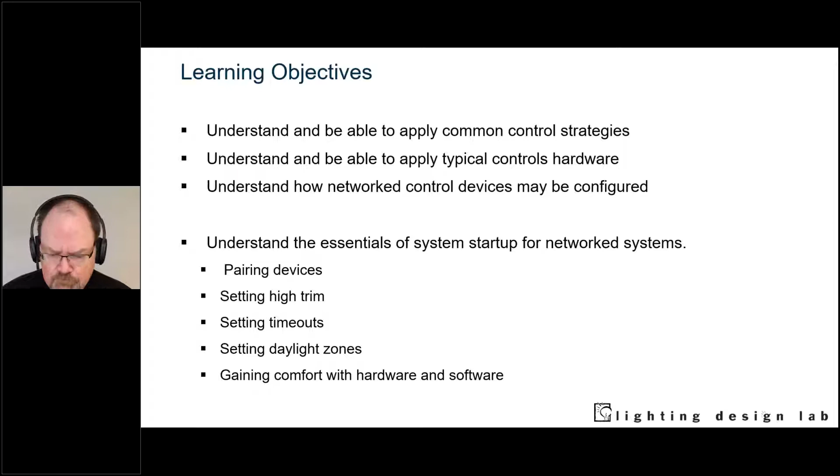So let's start off with the very beginning here. Why do we want to use advanced lighting controls or networked lighting controls? The idea is that we want to take most advantage of our investment in lighting systems, to maximize their benefits to all of us within the built environment.

What are some of the things we might talk about? Well, flexibility, satisfaction, aesthetics, maintenance - we can go through all of these things. But the idea here, from the very beginning, is: if you buy a piano and you don't tune the piano, you don't get the proper benefits of that piano. So let's start from that basis and move on and talk about some of these.

So flexibility. In my world, the most important reason for using advanced lighting controls is flexibility, space flexibility. You want to be able to offer as many different ways to interact with your architectural investment as possible, and make sure that it's going to function the way that you're hoping it will. This is a great example here.

These are 3 different lecture halls at the University of California, Davis. Let me be clear, these photographs were taken several years ago when I was working on a project there called their Smart Lighting Initiative. They may have changed by now, who knows? However, at the time, none of these spaces had significant lighting controls or any dimmability at all.

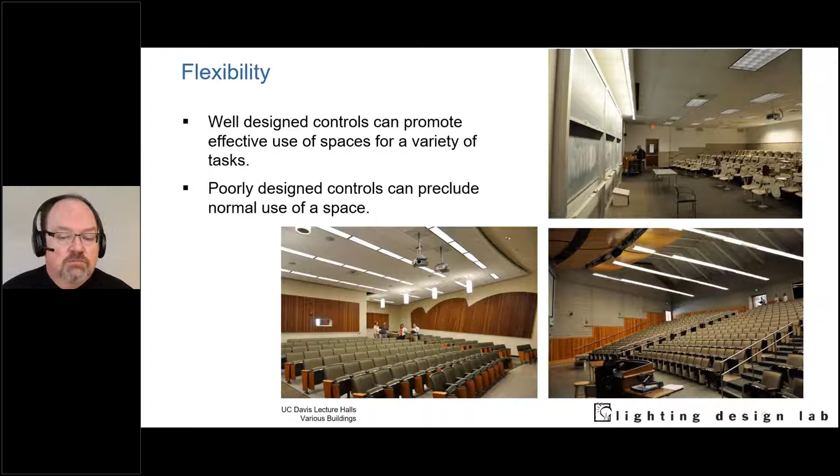All right, so flexibility is one thing. What about productivity? There are a lot of elements of productivity. We've talked about productivity in the lighting industry for many years. Jennifer Veitch, National Research Council of Canada, I believe, worked on a study in the early 2000s having to do with quality of light and productivity. A lot of that same stuff really extends into lighting controls.

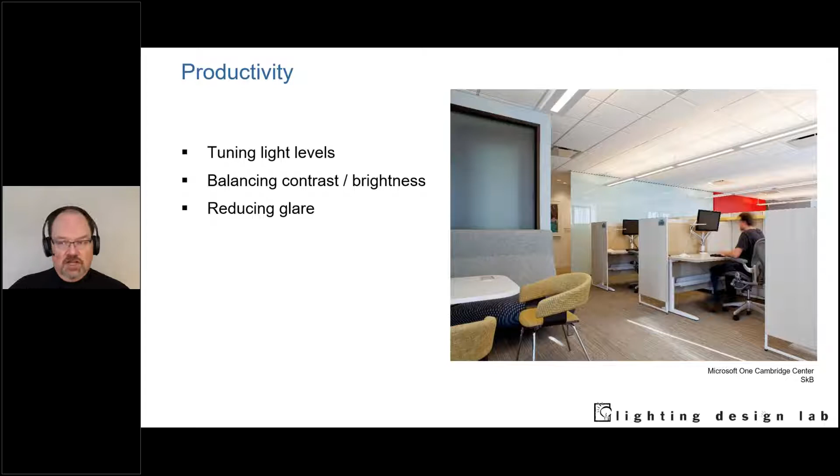We all like to be able to do things like have control, tune our light levels so that we're getting the light we expect - not too much, not too little - balancing contrast and brightness, reducing glare, and actually being able to change our lighting and light levels according to whatever specific tasks are.

That really does lead right into user satisfaction. We all like to have personal control over our environments—the more control we have, the happier we are. Studies have shown that private office users, when given the ability to dim their lights, will dim them down below whatever light level the design team initially suggested. So that gives user satisfaction, and it also gives a certain amount of energy savings. These are good things to be able to do.

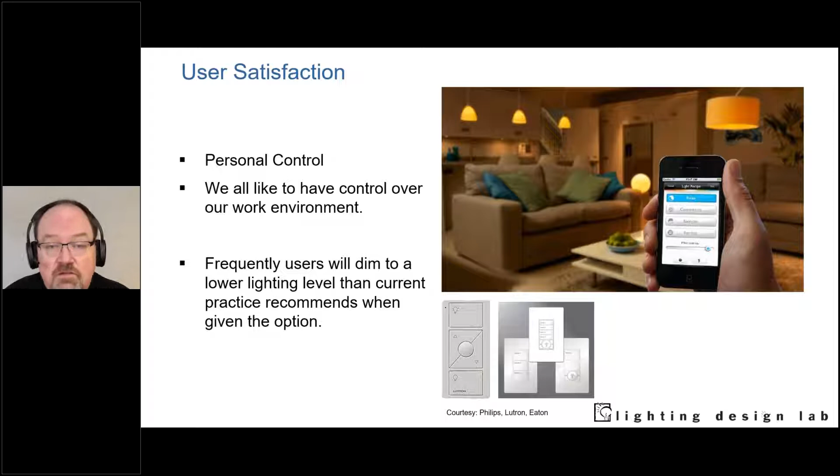Maintenance. Modern light sources are LEDs. What is an LED? It's basically a solid state device, and like all solid state electronic devices, the number one enemy is heat. If we take our LED light source and underdrive it, dim it, that effectively means it's generating less heat, which theoretically means we're going to potentially extend the lamp life.

By using lighting control systems—turning the lights off when we don't need them on, task tuning so the lights are lower in intensity than they otherwise would be—all of these things can lead to significant improvements in lamp life and longevity of the system. Some systems also have a variety of talkback features. They may offer an indication that the junction point of the LED is running too hot, or the driver is running too hot, and there may be some issue there. So that's a potential maintenance issue as well.

Another one we all know about: sustainability programs. The relatively new kid on the block, though it's been around a few years, is the WELL Building Standard. I hope everybody has heard of it—think of WELL building as LEED for people. LEED is predominantly about the physical built environment, the health of the building, the materials of the building. The WELL Building Standard extends that and asks: what about the people that live in that building?

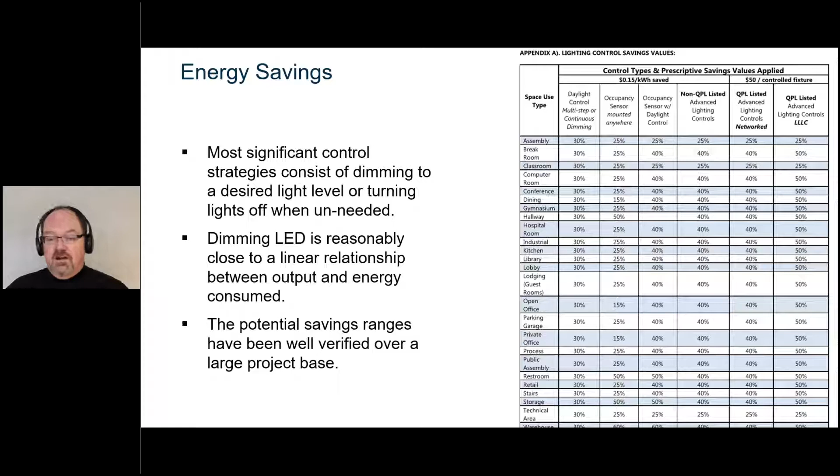Energy codes. We certainly need to pay attention to energy codes. In fact, the Seattle Energy Code has just been updated. We, Lighting Design Lab, just partnered with the Seattle SDCI to put together a series of energy code update webinars. If you are interested in specifically the Seattle Energy Code and changes, go to our Lighting Design Lab webpage and you'll be able to find the recorded webinars that we put together there, some really good information. We'll also talk more about energy codes a little bit later. I think that will be tomorrow.

And of course, there are others, right? This is my list, and the order of the list is specific to me, right? It's what I have found to be useful over the years in order to get owners to install lighting controls, in order to get end users to understand why we're installing lighting controls. And I found it very helpful. Your list may be a little bit different, and that's okay, right? Whatever works for you is what you should really look at.

And I will say that the order of the list might change depending on where we are, right? Here in the Pacific Northwest, we're blessed with some of the lowest electricity costs in the country, right? If I was having this conversation in Hawaii, where electricity rates are multiples of what we pay, the energy savings might jump a little bit higher on the list, right? So you really have to bump those around as necessary to make sense with what you're doing and your specific needs. Okay. So those are some of the reasons that we might want to use advanced lighting controls.

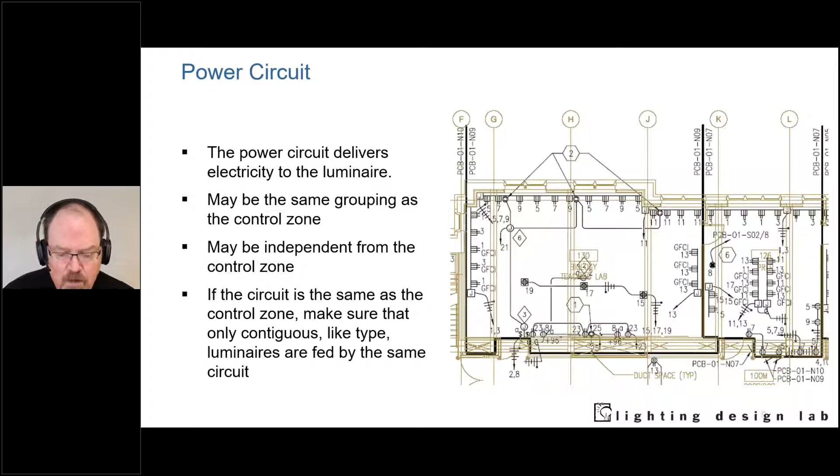A more modern way of thinking about lighting controls, and this really starts to come from theater initially, is the idea of the control zone, or if we're talking about theater, we would call it a channel. The control zone is a logical grouping of light fixtures that are always doing the same thing together, right? So if I have a fixture here and a fixture here, if they always want to dim up and down together, they can be on the same control zone.

If there's ever a time that I want this fixture to do something differently from this fixture, that has to be a different control zone, right? Because physically there's a device telling this to dim, and I can't break them up if they're on the same physical device. So they might be the same grouping as a power circuit, but more likely they're independent from the power circuit. Most of the time, we actually feed a whole bunch of control zone devices from one circuit these days. That simplifies installation. It also simplifies procurement and a variety of different things.

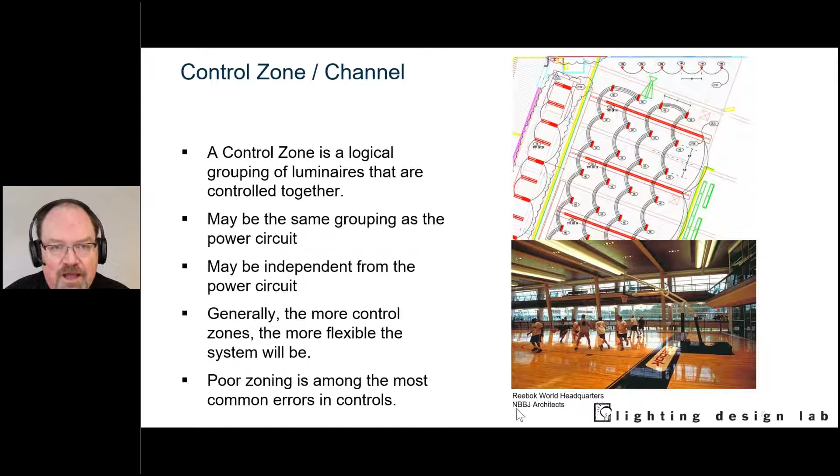And you'll notice that we have, you know, I'm realizing that you're probably not seeing my cursor. So let me get my spotlight. There, you probably should see this now. I hope you see it anyway. Yeah, we can see it. Okay. Sorry, it's been a while since I've done one of these.

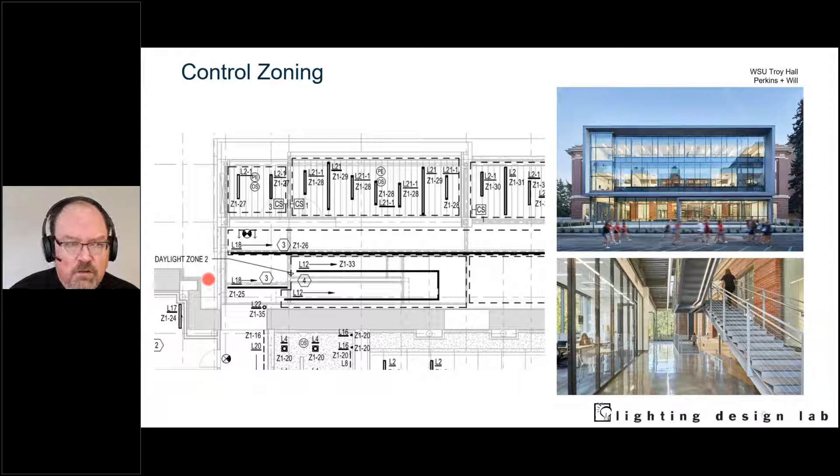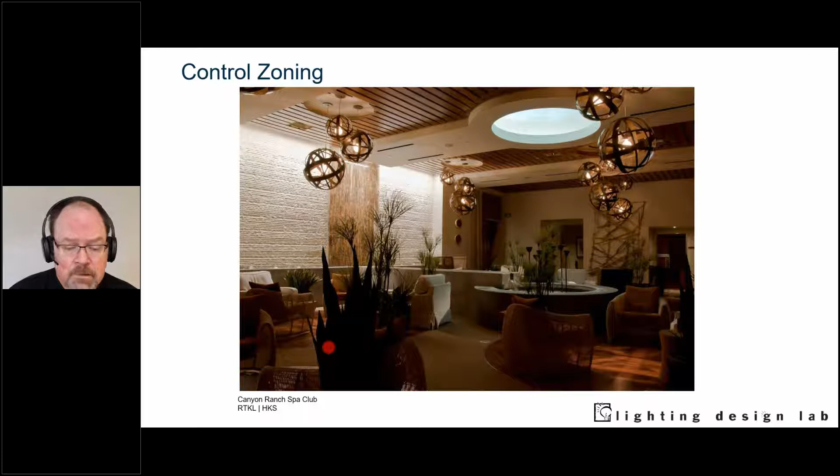So it's repeatable. You really want to be using dimming now. You don't want to be using switching anymore because everything we use is dimmable. And you want to have something that we call a fade rate. So if you have light that changes quickly, it's a problem. It's sort of jarring to you. If you have light that changes slowly over time, say 30 seconds, you don't notice anything's happening.

Now, you may be enjoying, let's say, a happy hour libation with some of your coworkers in the before time when we could do things like that, and hopefully will again in the future. And somebody starts fiddling with the lights, something like this. Something surprising happens. You get jogged out of whatever it is you're talking about: the day, your kids, whatever. So this forces you to look up.

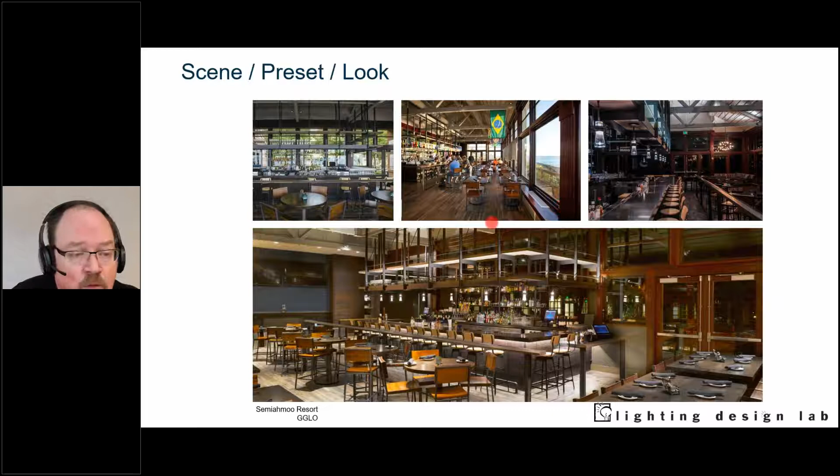Now we are going to have a brief pop quiz. You didn't realize there were going to be pop quizzes, did you? So what are some of the reasons that we might want to use advanced lighting controls? Are they flexibility, user satisfaction, increased productivity, they add complexity to the project, maybe it's energy savings? What do you think? What are some of the reasons that we might want to use these control systems?

All right, give you another couple of seconds here. And let's close and share the results.

So how do we think here? 60% of you think flexibility, 10% user satisfaction, 10% increased productivity, 20% energy savings. The fact is that all but adding complexity are in fact correct, as one might surmise. Which of these becomes paramount really depends on what your project is.

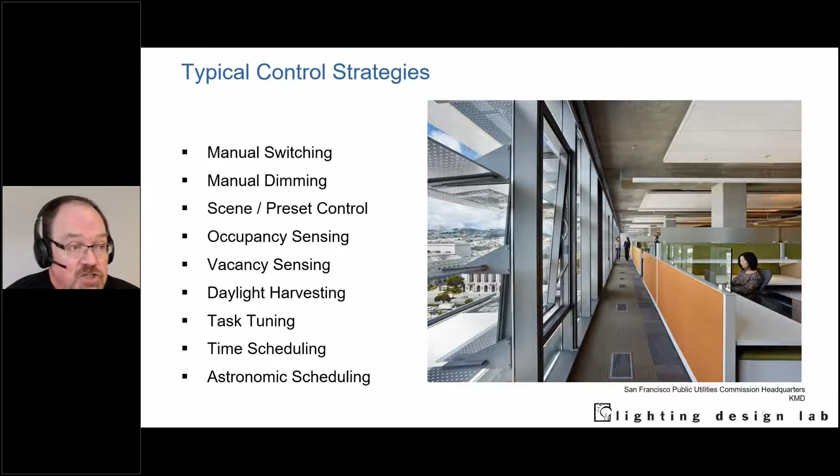The good news is that network lighting controls handle all of these easily, and there is the ability to mix and match and change over time as we need to based on some of the hardware.

Okay, so manual switching - well, we all know about manual switching, right? You press a button or you flip a switch and lights go on, lights go off. That might be power handling with line voltage, it might not be power handling, it might have low voltage relays somewhere, right?

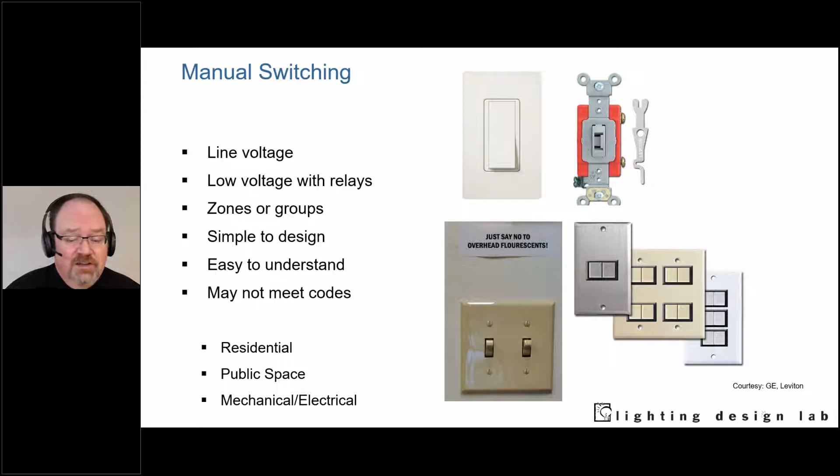The thing is, most of the time, I don't recommend people do manual switching anymore, right? Most of the time, the light sources that we're talking about, they're LEDs, they're inherently dimmable in almost all cases for specified lighting. So really, we should be talking about manual dimming, right?

So manual dimming gives you the ability, whether it's a power handling device with line voltage, or remote control to a dimming cabinet, or sending a signal to a dimming driver - we'll talk about that a little bit later - the idea is that instead of just being able to turn lights on and off, you want to be able to have some ability to modulate the amount of light that you have in the space.

This really does come back to that notion of user satisfaction. It also comes back to flexibility, right?

Now we also can talk about scene or preset control, right? And this gives you the ability to have a device - in this particular case we're looking at one of the Lutron GRAFIK Eyes or a Pharos system or similar - and it's the ability to have a variety of different control zones that you can program, and then you can call them back either from the main unit or from some kind of remote unit, right? So it's repeatable, it's great and all that stuff.

Now, it used to be that there was this continuum, right? You had to choose - you had either switching, or you had manual dimming, or you had some kind of scene preset. And if you're going to do the scene preset, you had to commit to this $1,500, $2,000 in-wall unit to be able to do that.

When we talk about network lighting controls, normally speaking we're talking about a series of parts and pieces that all talk to each other, controlled today with some kind of programming, most commonly put together with an app from your smartphone or sometimes your computer. But it really means you can do all of these three elements with a relatively small kit of parts.

Let's start again. Before I start the actual video, let me give you a quick synopsis. This is a lighting control board, one of the ones I designed and built for this class, that is intentionally made to look an awful lot like building wiring.

Essentially, we've got a bunch of light fixtures. Think of each one as its individual control zone. A control zone could be one light fixture, or it could be a number of light fixtures. We've got through wiring coming from, let's say, this cord over here coming from our load center, from our circuit breaker panel, and it comes into each box, and each box is daisy chained. So we have through wire from box to box to box to box to box, and then we go out from the box to the individual light fixture.

So this is really what you would find in a building, except writ small. The biggest difference here is that this little bit of conduit is 2 inches instead of 10 feet.

Piggybacked onto this, we have what we call load controllers. These are specific load control devices. They accept a signal from a lighting control system, and they are essentially saying turn on, turn off. They have a relay within them, and then they're sending a 0 to 10 volt signal, dim up, dim down, according to whatever the control system is saying.

Now, this is one manufacturer's control system. There are 8 or 9 that we use in these classes when we do the hands-on components that can all do the same thing, and they can all do it well.

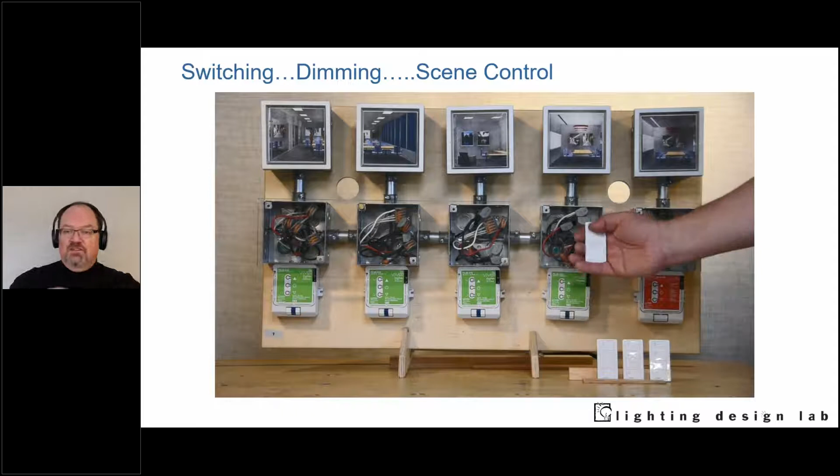So let's see what this maybe means a little bit here. I've got a 2-button switch, so I am turning lights on and I'm turning lights off. So if I want to, I can do manual control, manual switching, up, down, just on, off.

I can also, with the same system, with a very similar kind of wireless device, do raise and lower of a single zone. I'm turning it on, I'm turning it off, I'm dimming it up, I'm dimming it down, turning it off.

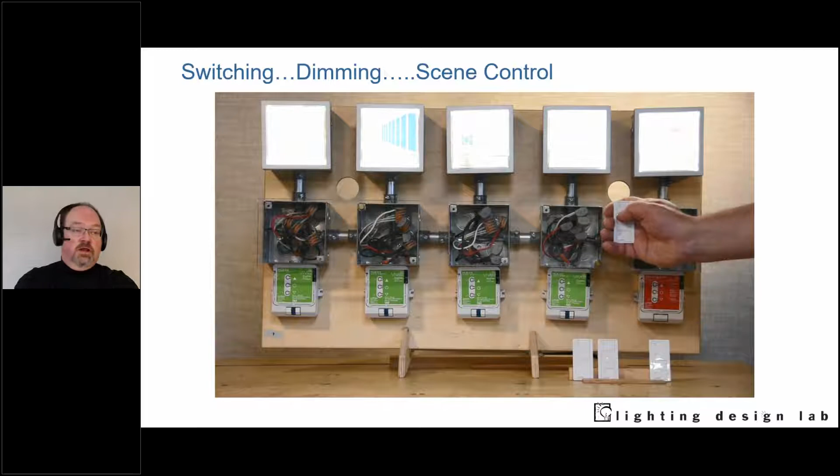Then, from the same basic kind of device, I can turn on a whole scene. I can turn on a whole bunch of fixtures, and I can raise and lower the whole group if I want to. I can predetermine which of these want to be associated or paired with each individual device, or I can set up complete scene control.

So this is a 4-scene device. There's scene 1, there's scene 2, there's scene 3. So instead of having to go and purchase a $1,300 or $1,400 or $1,500 scene programming unit, now scene control, switching, or dimming, it really is all about programming. You're going to have the initial devices anyway, so it's really all about choosing how you want to use them.

Do you want individual switching? Do you want individual dimming? And most of the time, this is available wireless. You can do it wired as well, but it is what it is. All right, so I hope that makes some sense.

Let's skip that. All right, so that's a little bit about the switching, dimming, some of the capabilities you can get to. Let's talk a little bit about some of the other strategies. There, of course, is occupancy sensing. We're all familiar with this: you walk into a space, the lights turn on, a certain period of time later, the lights turn off.

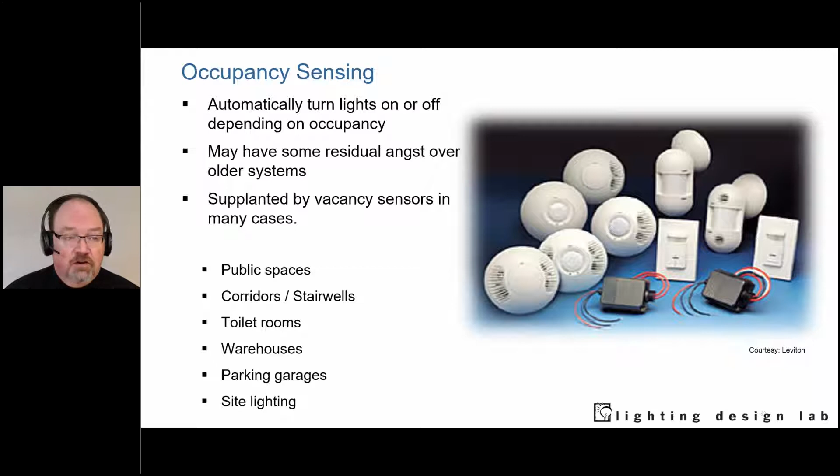This is separated from vacancy sensing. Vacancy sensing requires a positive push on a button in order to have the lights turn on, otherwise the lights won't do anything. So it's the difference between manual on and automatic on, which is between them. Now there are arguments, particularly with respect to usefulness and energy savings for both.

But the reality is, if you're going to use a sensor, use a sensor. In all but one instance that I'm aware of, the actual physical sensors are the same, and the difference between occupancy and vacancy sensing is entirely programming. We'll talk later about some programming tricks for occupancy and vacancy sensing to make them work really well, but that'll be in the programming segment.

One thing to think about with occupancy and vacancy sensors is that most of them, at least for modern systems, certainly all the wireless systems, are passive infrared. So what does that mean? It means that a passive infrared sensor is essentially looking for a heat signature across a number of segmented fields and movement across those segmented fields.

So what does that mean in practice? Well, if the sensor can't see you, then it's not going to understand that you're there. Or said differently, if you can't see the sensor, the sensor can't see you, so you're going to have false triggers off. In fact, a friend of mine in Idaho just moved to a new office last week, and she said the lighting was great and all, but the occupancy sensor keeps timing out on her because it's not seeing her.

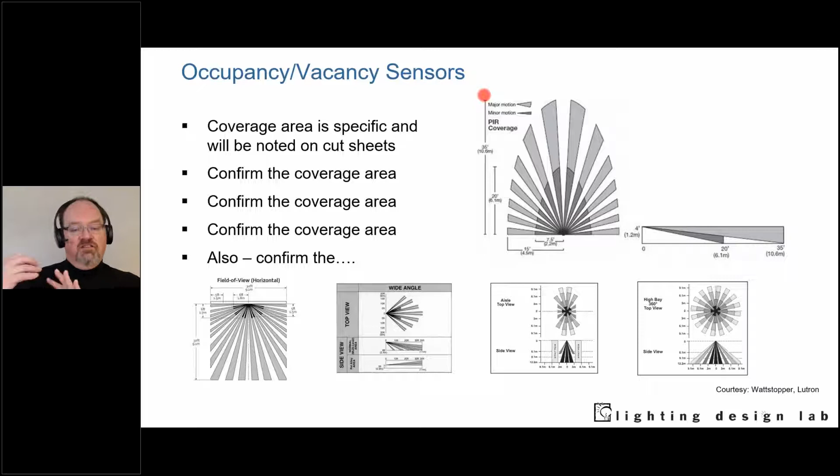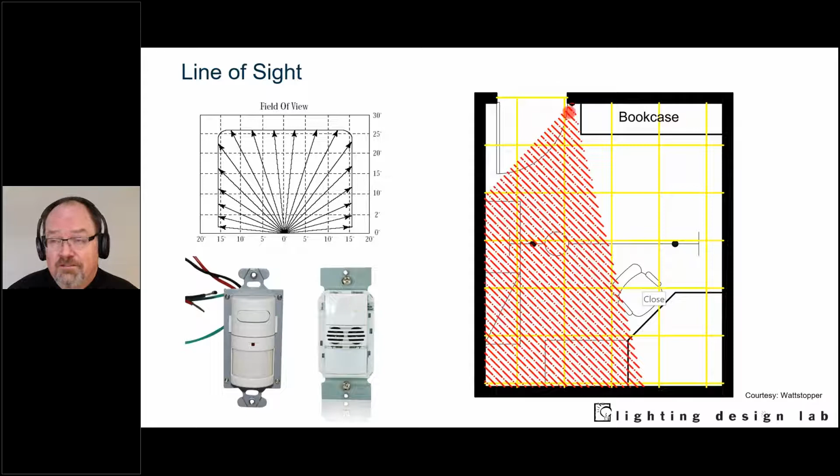So as we talked about, if you put sensors in the wall, this is a very popular way to put in occupancy sensors, because if you've already got a switch leg going down the wall, you just have to replace the toggle switch. So it's great for retrofits. But the problem is that it frequently has difficulty seeing people. If you're going to run into that, go ahead and put in one of these ultrasonics rather than a passive infrared. I normally prefer passive infrared for some reasons, but if you're going to have a situation like this, go ahead and use the ultrasonic.

Even better, go ahead and put them up on the wall high, like in a classroom, so that you can see a higher percentage of the room. Or even better, my favorite choice, put your sensors up on the ceiling. When you put things in the ceiling, they can see basically the entire space - that's important.

I will say that it took me a while to really warm to the idea of battery-operated sensors, but I showed you that San Francisco Public Utilities Headquarters project. That was completed in 2012. That was the very first project that I ever designed that had nothing but battery-operated sensors. And actually, it worked out so well that that's pretty much all I use anymore is battery-operated, right?

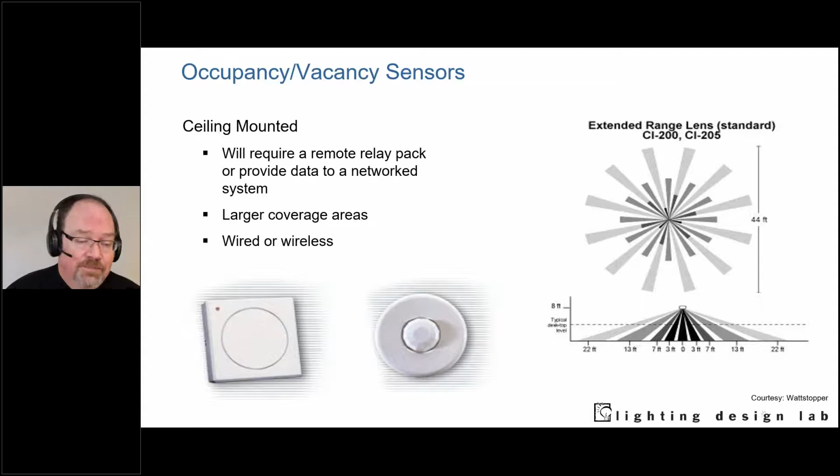The amount of pipe and wire that you save is huge. Also, the ability to quickly and easily shift things around if necessary. You know, the sensor is 2 feet too far that way to pick everybody up. Great, move it, not a problem. Or add another one. These things are not expensive. Stick another one up into the ceiling, pair it. It takes 5 minutes to program it to the system. That's why I kind of like these sensors. All right, so that's occupancy and vacancy sensors.

What about daylight harvesting? So we have this idea, right? We have abundant daylight in the space. We want to be able to dim the lights, dim, dim, dim, never switch anymore. Dim the lights according to the amount of light that's available.

If we had more time, I would tell you a great story, maybe later, maybe tomorrow I'll tell you the story about the Unum Corporation up in Maine.

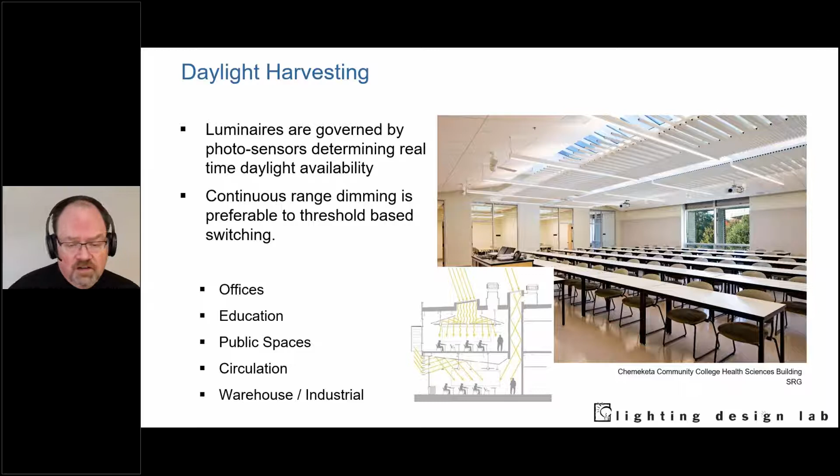So daylight harvesting, we're using a photocell. There are a few things to think about with respect to this, right? So you can have what we call open loop sensor systems, which basically means that the sensor is looking towards the sky, towards a window, through a skylight. Essentially, think of this as a broad brush, right? It's not as fine-tunable as the closed loop, but it's very easy to commission, right? It's always kind of looking outside. It's sort of the big ship of daylight controls. It kind of slowly makes some changes.

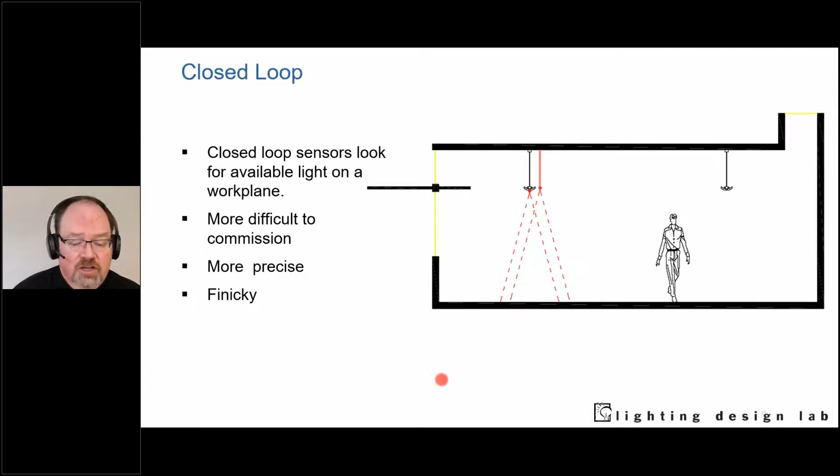Okay. So next one is task tuning or high-end trim, right? So that's the idea that as lighting designers, we've all been taught to overlight spaces for a variety of different reasons. The number one reason is so that we can compensate for what we call lumen depreciation, right? So that over time, all light sources degrade. They'll put out less light as they age. There are other, we call them light loss factors, right? Dirt depreciation and some others.

There's also, frankly, let's just say most designers will add in a little bit of fudge factor because there may be last minute changes to architecture, right? So if I really design a close system and I'm assuming that I'm going to have a 90% reflective ceiling tile because that's what the construction documents show, but then later on the site, I find that they've value engineered that to a 70% reflective ceiling tile. Is that going to have an impact on the lighting?

Yes, indeed. What if they've gone from a floor that's like this, that's relatively reflective, to a dark carpet? Well, that's going to have an impact. What if they've gone from a white wall to a dark blue wall because that's the corporate color? Well, that's going to have a big effect, right?

So typically a lighting system new out of the box is somewhere between 20 and 30% higher light level than it actually needs. Task tuning or high-end trim basically means you go ahead and from day one dial it back so that you dim the lighting system down to the target light level that you were aiming at anyway, and that can save as much as 20 to 30% of the energy right off the bat. Over time, you're probably going to want to come back in 3 years, 4 years down the road, bump it up a little bit, but over that whole time, you've been saving a ton of energy.

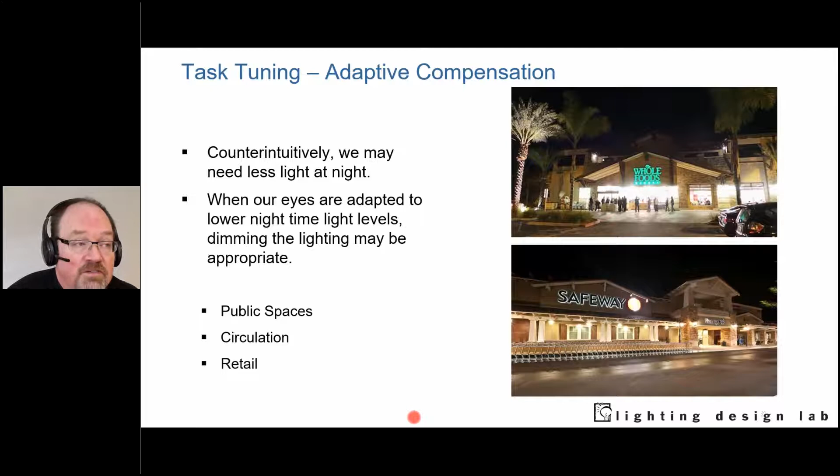The Safeway manager that I was working with, I think he was actually the Safeway CEO, was in for the meeting. Wasn't really thrilled when I told him that I referred to this idea of the Safeway squint. There was a Safeway up on Broadway in Capitol Hill where if you walked in, it was so overlighted at night that it actually hurt you for the first 5 seconds as you walked into the space. That was all wasted energy, right? The only usefulness for it there was to hurt my eyes, right? So this is one sort of key area that you can use adaptive compensation.

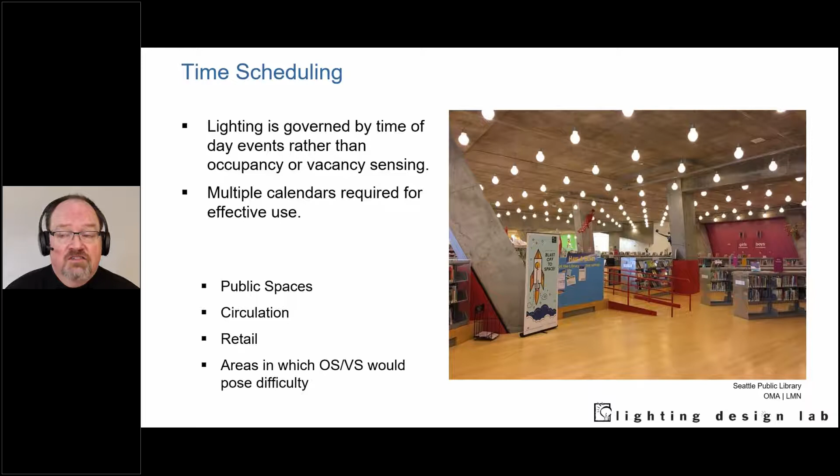Time scheduling, we all know about time scheduling, right? We have the ability to turn lights on, turn lights off according to some schedule. I will tell you that this is much less common now in buildings than it used to be because more and more areas require occupancy or vacancy sensing. So unless you're going to use time scheduling in conjunction with occupancy and vacancy sensors, and we'll talk about that in programming, you really tend to see most things being governed by sensors, except maybe large areas or lobbies, places like that.

Special case, astronomic time scheduling. So astronomic scheduling basically means you take the longitude and latitude of your space. For Seattle, that's 47.6 degrees north by 122.3 degrees west. And the system will calculate every single day sunrise and sunset.

Why does that matter? Well, if you've got exterior lighting, facade lighting, whatever it happens to be, if you want to have all of the lights come on or all of the lights go off according to the availability of daylight, this is a great way to do exterior lighting so that you don't get into that whole issue of having a multiplicity of photosensors. You might have a bunch of pedestrian poles, each one that has its own photosensor. And then for the space of about 45 minutes every night, they'll come on at different times, and it looks really, really lovely. This is a much easier way to do it.

Coincidentally, this used to be really, really exotic. You used to have separate devices that would actually do all the calculations for you. Now, every single lighting control system I'm aware of does this just automatically because it's a trivial calculation. Right?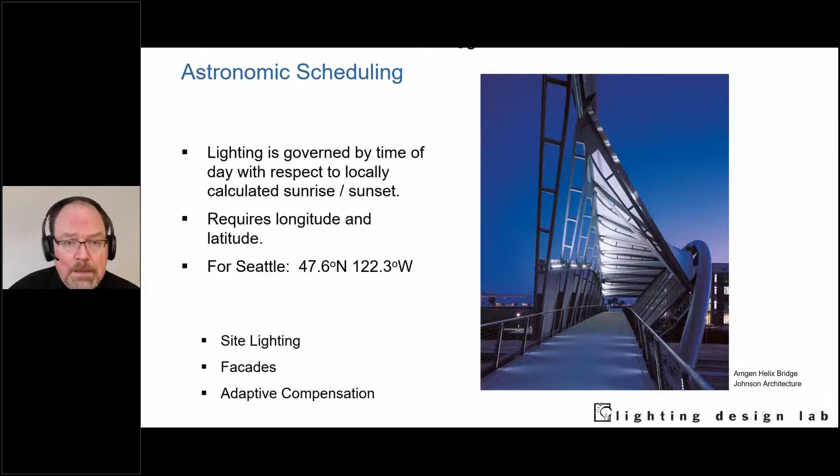Okay. Load shed. A load shed or demand response. This is another control strategy. This kind of came into its own during the Enron days, particularly the California brownouts. Although I suspect, given the recent events in Texas, this is probably going to become really sort of interestingly thought of again. But it's also being considered in a lot of different locations, including here in the Pacific Northwest. Not as much for grid stresses. It was really initially put together for grid stresses during the California brownouts from Enron.

But if we go ahead and make use of information from our electric utilities that are telling us about power fluctuations based on the wholesale market, and when those fluctuations are occurring, maybe the energy from 6 o'clock to 8 o'clock at night is the most expensive, right? So then the utility can send a big user a request to cut their load. If we've got a large area lighting control system, we can go ahead and reduce our energy use by a certain percentage, still allow us to use our space while providing 20, 30, 40, whatever it is percent diminution to the electric utility, right?

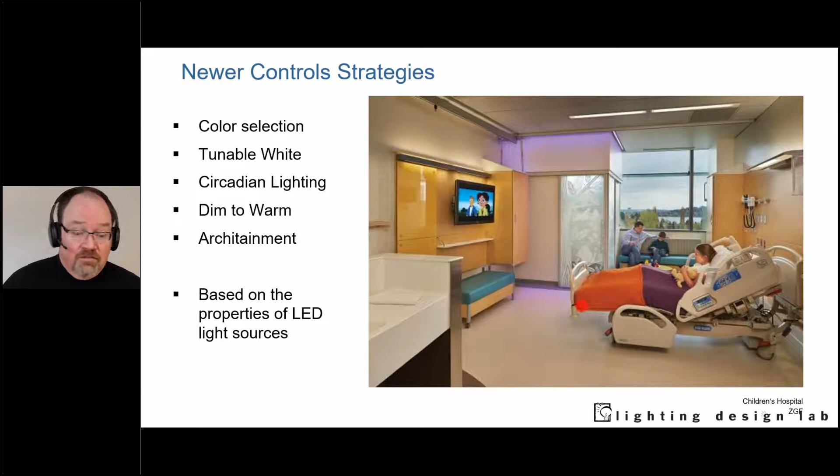This is a good thing to be able to allow them to do. So what are some of these strategies? Well, color selection, right? We just saw one. But the idea is that we have multiple LED chips with different colors that we can mix and match for different purposes.

This is one of the cubes over at Microsoft, over at Building 17. This is an internally illuminated, it's essentially a glorified staircase, right? The idea is that it encourages people to do active vertical circulation rather than going to the elevator core. It's pretty cool. But we can essentially turn these cubes into whatever color that we want with this internally illuminated LED system with Barrisol screen.

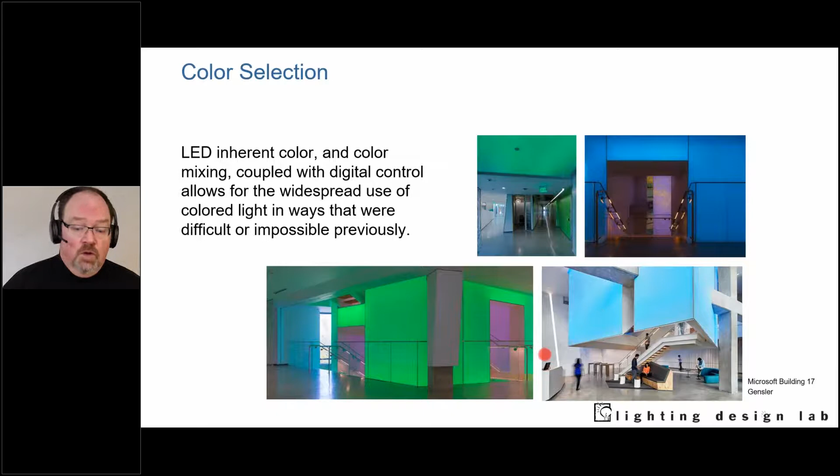If we talk about predominantly white light, we have two real things that we can talk about, right? One is tunable white warm dim, which essentially means that you have a couple of different chips on board in your light source, so that you have a warm chip and a cool chip. And as you reduce the power to the light source, typically from a phase cut dimmer, it dims towards the warm, just like an incandescent would, right?

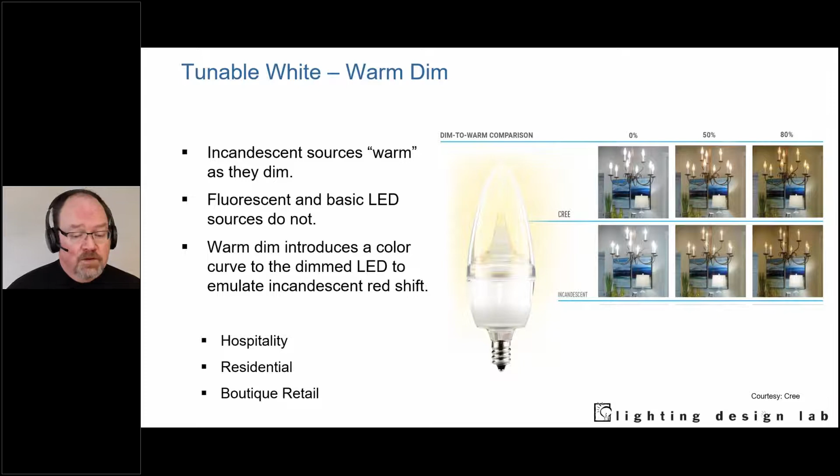If you take an incandescent lamp, you have it at full output, it's one color, 3000 Kelvin, 2700 Kelvin, whatever. As you dim it, the filament cools, it shifts to the red, and it gets warmer. It gives us that really nice warm glow that we really like for residential and hospitality. Well, LED sources naturally don't do that unless you have them set up this way, right? But warm dim is one opportunity for that.

The other is tunable white, which operates essentially the same kind of way, right? You've got a warm and a cool board or cool chip, and you might have some intermediates in the middle there as well. But the idea is that you have the ability to essentially mix and match to get to a variety of different color temperatures or spectral characteristics along what we call the black body curve.

If any of this is unclear to anybody, please go ahead and go back to the Lighting Design Lab education page and look into the light and human perception class. A big discussion of all of this is to be found there, and you can sort of bring yourself up to speed on it. But the idea is that we would use these things to affect mood, affect our endocrine systems for our circadian systems and so forth, or sometimes just for aesthetic reasons, right?

And we see these in offices, right, where we can go ahead and pick and choose what color of light we want, right? Do we want it warmer? Do we want it cooler? To a certain extent, that is a personal choice, but to a certain extent, it also has some impact on our endocrine system based on the spectral power distribution inherent in the light source, right?

And if you go ahead and make use of a lighting control system, you can potentially engage in some behavior modifications. This is something that's really, really of interest in schools these days, right? Or you can go ahead and add a time clock, essentially, and you can wind up having specific effects on, like I say, your endocrine system, your sleep-wake, serotonin, melatonin cycle.

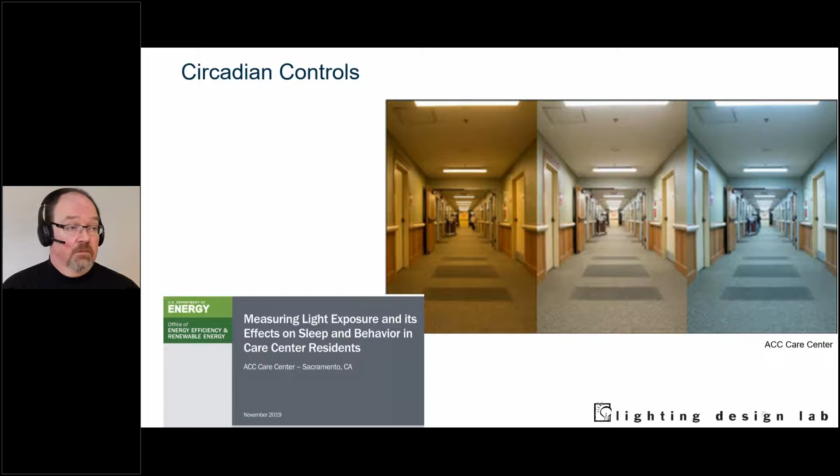So important stuff. Okay. And of course, there's architainment, right? We'll talk about that. But these control systems allow you to do all kinds of cool, groovy things. All right, so let's switch gears just a little bit again about some of these things. So we've talked about some of the strategies, some of the rationales, the basics.

Let's talk a little bit about hardware, right? When we're talking about lighting controls hardware, very frequently, if I ask the question of you folks, how many people have heard complaints about lighting control systems? Everybody's hands would go up, right? How many people have heard complaints about occupancy sensors not working? Everybody's hands would go up.

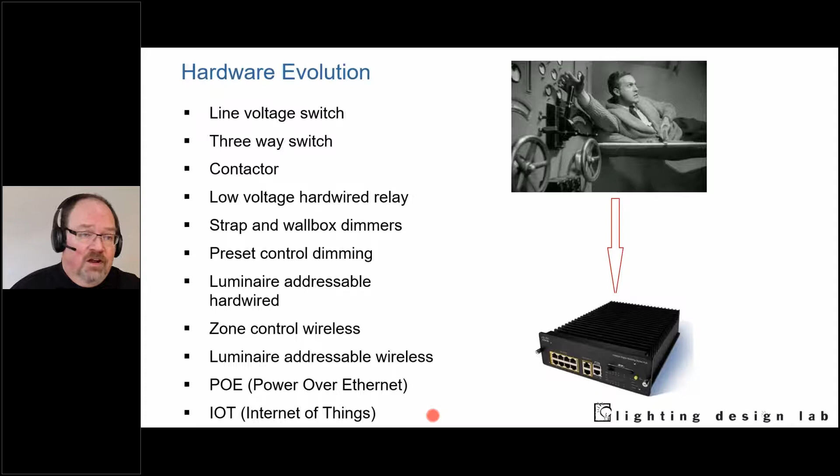I would submit to you that a big part of this has to do with the evolution of the hardware, right? We started out with this mad scientist with his knife switch there, right? And we've gone through switches and contactors and dimming systems and zone systems and PoE, power over Ethernet. And now we're up to the Internet of Things, right? But ultimately, what we've got here is the evolution from analog to digital. And we've seen this in every single device that we have, right?

15, 20 years ago, I had a Crackberry, right? And I was one of those people who you'd get off the plane and I'd be thumbing my way through my email, right? That was not a great device. It was a great device for the time, but it paled in comparison to the devices that we have today. A little bit before that, I was lucky if I had a cell phone that sounded like I wasn't in a fishbowl, right? So all of our devices, whether they're lighting controls, building controls, toasters, whatever it happens to be, the hardware is tremendously better than it's ever been.

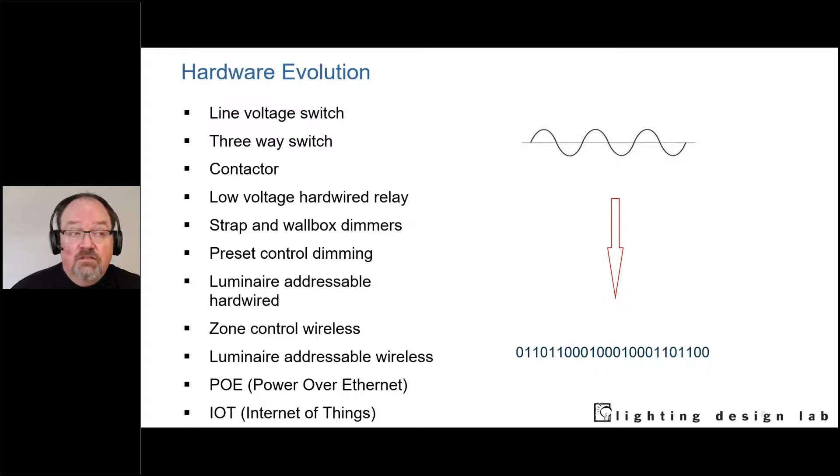So I would submit to you today that in almost all instances, if you have an example of an occupancy sensor or similar that's not functioning properly, it's probably bad design. It's probably because there's some problem with the way it's been set up or the way it's been installed or where it happens to be. It's probably not the device itself. So take that as written.

All right, this is another good time for another pop quiz. What are some of the key strategies, key control strategies that we might employ? Might be daylight harvesting, vacancy sensing, time clocks, task tuning, turning down thermostat. What do we think? What are some of the key strategies we might employ? All right, most of you have voted. Let's kill this and share.

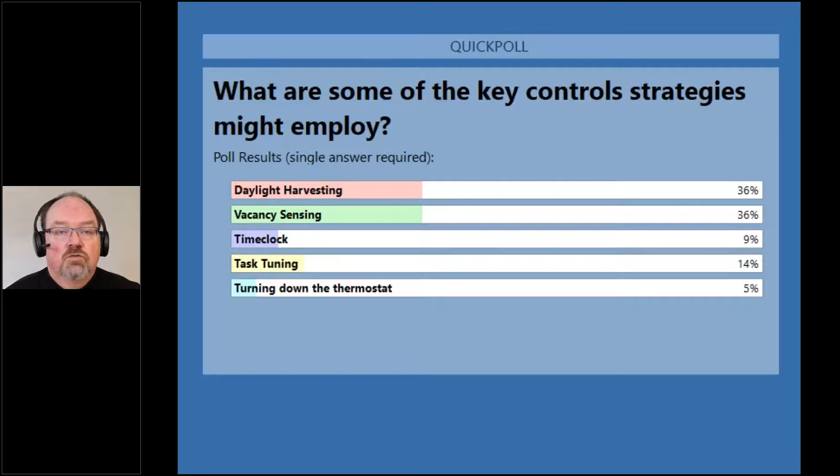So let's spend a few moments talking about dimming. I've mentioned that basically all light sources we're using today are inherently dimmable. LED light sources paired with dimming drivers means basically all commercially available lighting is dimmable one way or another.

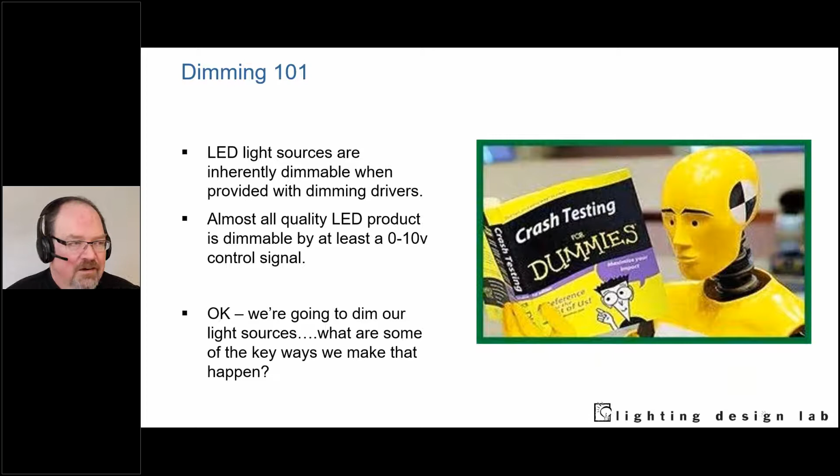Well, how did that start? If we went back into the old days, we'd find it in theater, because basically everything to do with lighting controls started in theater one way or another.

The original dimmers were essentially big tubs of salt water, with a cathode plate at the bottom and one at the top, each with wires going to them. If I wanted the lights brighter, I'd have a stagehand, hopefully with very good life insurance, plunge the plates closer together in this saltwater bath. The closer they got, the more current would flow and the brighter the lights would go. This was a very analog way to think about it. Pull them further apart, there's less current flow, and the lights get dimmer.

Very simple. Fast forward past half a dozen other technology improvements, and we came to the 1950s. A fellow named Joel Spira in New York came up with the idea of using semiconductors for dimming in one's house. The very first triac-controlled, or semiconductor-controlled, wall box dimmer was from 1959, from a small company called Lutron. This is a picture of it.

The idea is that you have devices that switch power on and off a certain number of times per second. When they turn the power on and off, and how many times they do it, determines how much energy is going to go, in this case, to a filament. That filament will then glow either brighter or less bright.

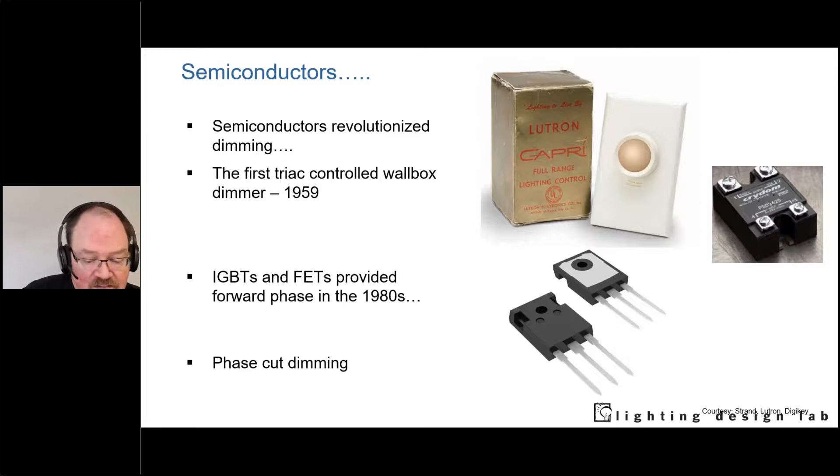So how does this work? In triacs, or silicon controlled rectifiers, we call it forward phase cut. Basically, the power is off, off, off. This is a sine wave — electricity can be represented as a sine wave, forward, backward, forward, backward, electrons moving.

They would do this 120 times a second, because that's how our power is delivered, with a 60 hertz or 60 cycle current — 60 times forward, 60 times back. Each one of these happens 60 times a second, but each half wave happens 120 times a second. So you're turning the power on and off 120 times a second. I hope that makes sense to everybody.

Now, what happens when you turn an electric circuit on is something called inrush. So instead of a pretty little sine wave, it would actually overshoot and then come back, overshoot, and then come back. That led to things like that nice 60 cycle phase hum we'd hear from filaments, because what they're doing is actually oscillating — it's forcing them to oscillate.

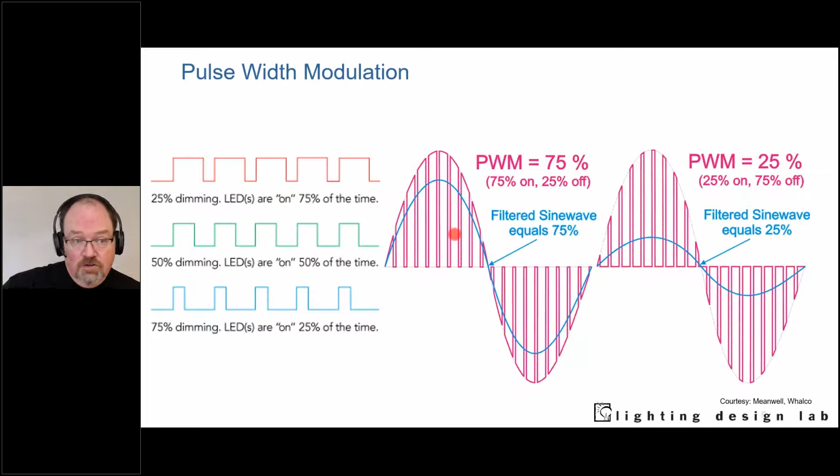Let me show you a quick demonstration here.

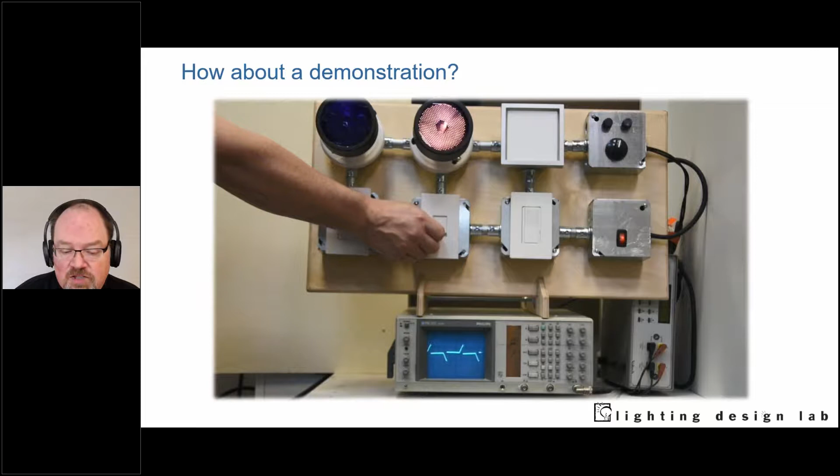This is the reverse phase, which is sliding on - soft start. You'll see that starts to establish the sine wave there. And the last one we have is actually pulse width modulation, so you'll see that it appears to adjust the amplitude of the sine wave because it's cutting it so quickly.

Most of the time when we're talking about screw-based LED light sources, they're phase cut modulation, either reverse or forward phase. When we're talking about native LED light fixtures, they're usually, not always, pulse width modulation, because the dimming is actually occurring in the driver itself.

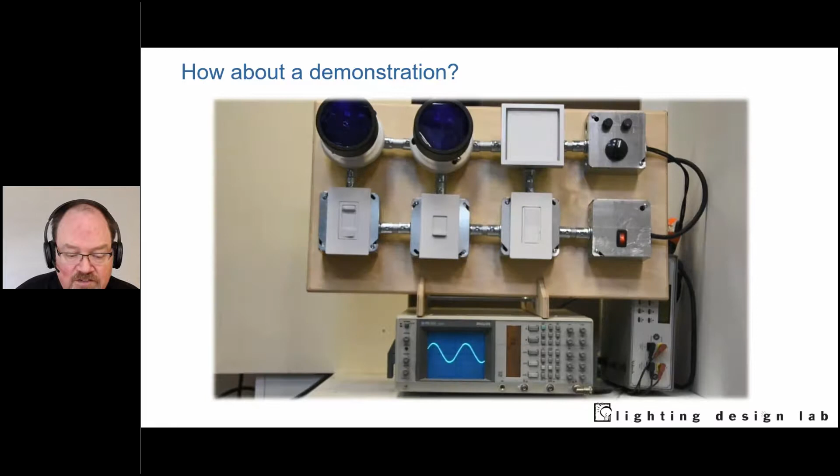So how does that work? Let's jump past this. A quick history of light sources - this is going to be very quick before we dive into that whole bit. If we were talking about this class just a few years ago, we'd spend a lot of time talking about all these different light sources. But the reality is, they're all legacy light sources at this point, so we're not going to spend time today doing that.

If you're interested, we can talk later offline about some of these other light sources, whether they're dimmable or not, how they dim, and so on. But the fact is, realistically, we're talking about LEDs. We've talked about this a little bit - solid state light sources, flexible, long life, all these things. None of this should be news to anybody.

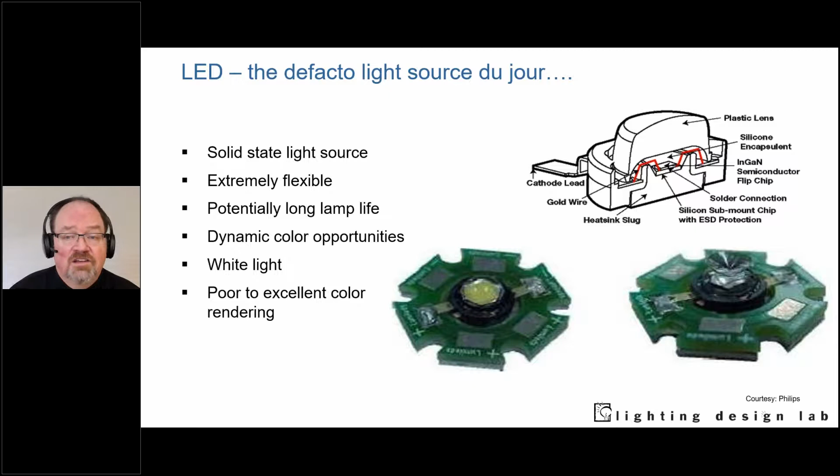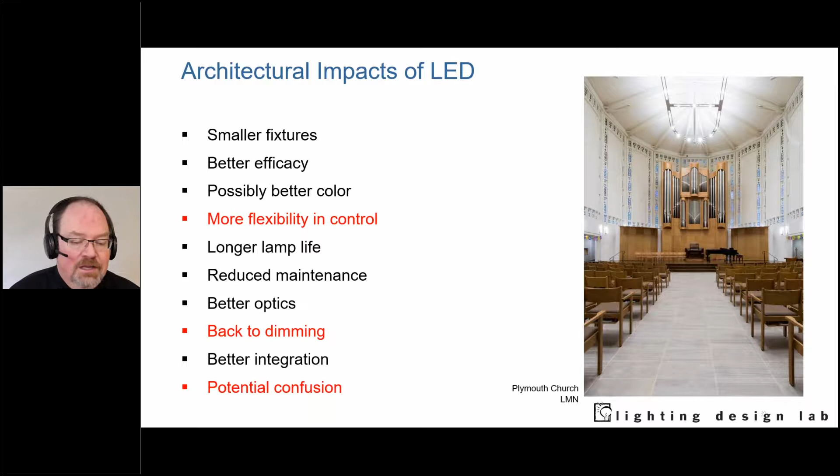But the impacts are huge, right? The biggest impact for us is that we have smaller fixtures with better optical control, but we're dimming. Dimming, dimming, dimming. There's also some potential confusion there.

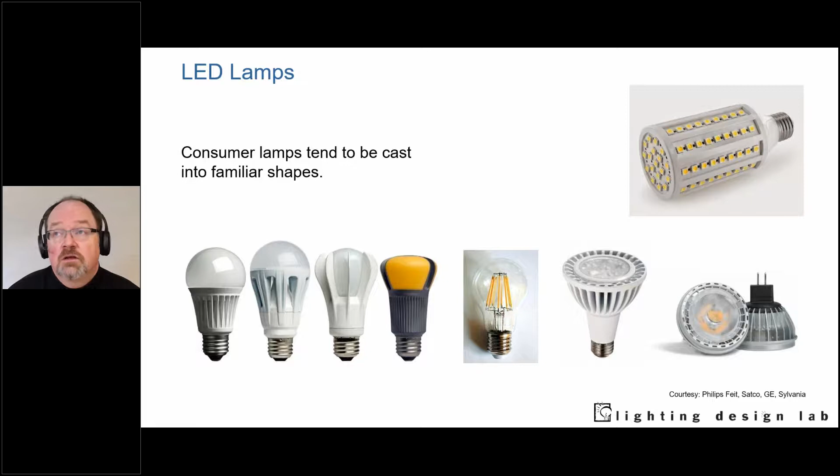As I mentioned, LED lamps, the screw-based lamps, come in a variety of shapes that emulate what we've expected from incandescent or metal halide. These will all be controllable, or mostly controllable, based on phase cut dimming - the wall box dimmers actually using the power handling. Native LED light fixtures, however, will actually be all about the driver.

So you'll have a light source with a variety of different shapes and configurations, and then there'll be some kind of power supply. This is a switching power supply, not entirely unlike the switching power supplies we knew as electronic fluorescent ballasts. The physics is a little different, but it's important to understand there are a couple of different types.

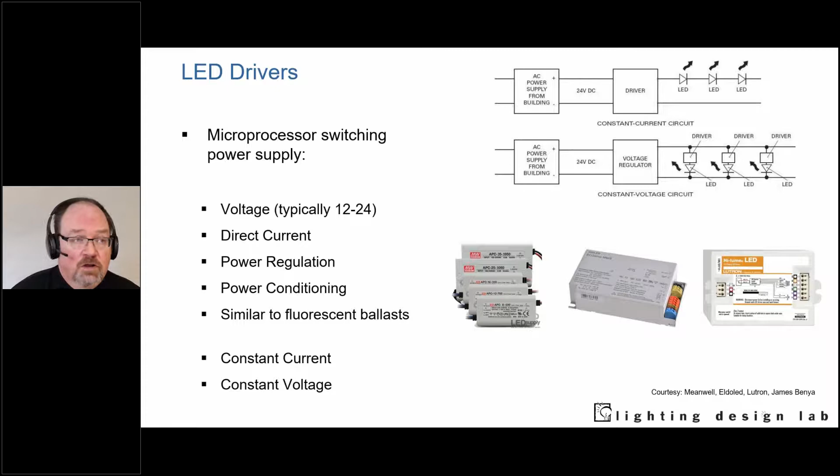You can have constant current or constant voltage drivers. We're not going to get too much into them, but suffice to say there are different types, and the different types of drivers - some will allow you to dim more deeply than others, some will give you more of an opportunity to see flicker from the LED light sources than others.

So if you really need low flicker or no flicker, you're probably using a constant current reduction. That is not, however, going to allow you to achieve very deep dimming. This is not that important for you to know in detail right now - it's a bit beyond the level of this class. Understand there are differences in drivers, and you'll need to work with your manufacturer to pay attention to their dimming curves and how they allow dimming, and also ask them questions about flicker.

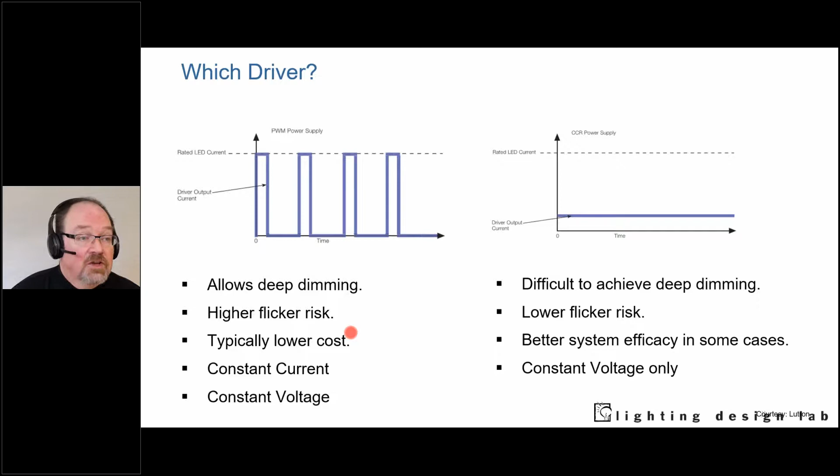Also, in particular, ask for samples. If you're doing big projects, get samples, try the fixture with the dimming system, and make sure that flicker isn't happening - make sure the flicker is acceptable to you, whatever level.

So what is flicker? All light sources will flicker - every single light source you can name, including incandescent, will flicker unless it's being powered by a DC source. We can think of flicker in two ways: there's amplitude, how much it's flickering, and frequency, how fast it's flickering. As it turns out, flicker in incandescent typically doesn't matter because the amplitude is relatively low - the change doesn't happen as much - and the frequency is 120.

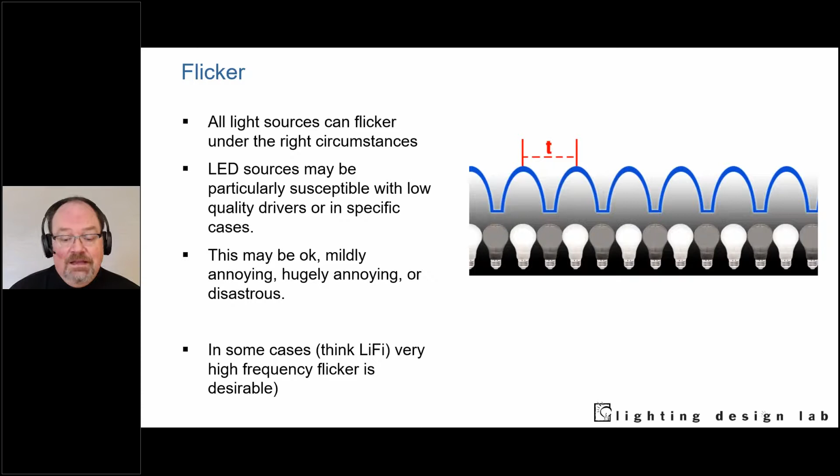When we were talking about magnetic fluorescent, it was significant because you could see the flicker, and it was very annoying. It would happen at 120 times a second. With LED, you can actually see flicker in a lot of light sources too, and it can become a problem. In a lot of ways, you get what you pay for - low-cost drivers and low-cost systems tend to have more potential for flicker. We understand how to deal with these things just like we did with fluorescent: increase the frequency, because the higher the frequency, the less likely you are to perceive it. The amount of amplitude or modulation - you don't have as much capability with LEDs because they're switching on and off, that's just part of their deal. So if you really want low-level dimming capability but want to avoid flicker, you're going to need a driver power supply that goes up in that range. I hope that makes sense.

Now there are a lot of ways that we can review flicker. Some of you may have things that look like this - this is a flicker checker that we used to use for fluorescent ballasts, where you spin it and look for stroboscopic effects on the wheel. You can also find stroboscopic effects with your phone: point it at a light source, put it in video record mode, and scan it back and forth - if you see scrolling lines, that's perceptible flicker. That's something we call refresh rate mismatch.

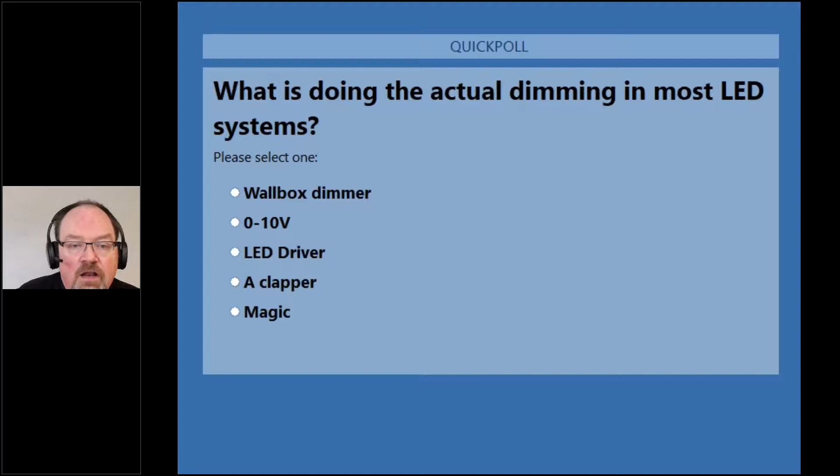So, share this - what is doing the actual dimming in most LED systems? It's the LED driver in most LED systems, unless we're talking about screw-based systems, in which case the wall box dimmer itself is doing the actual dimming. The driver, and magic of course, is actually a good answer as well, because sometimes it really does seem like magic.

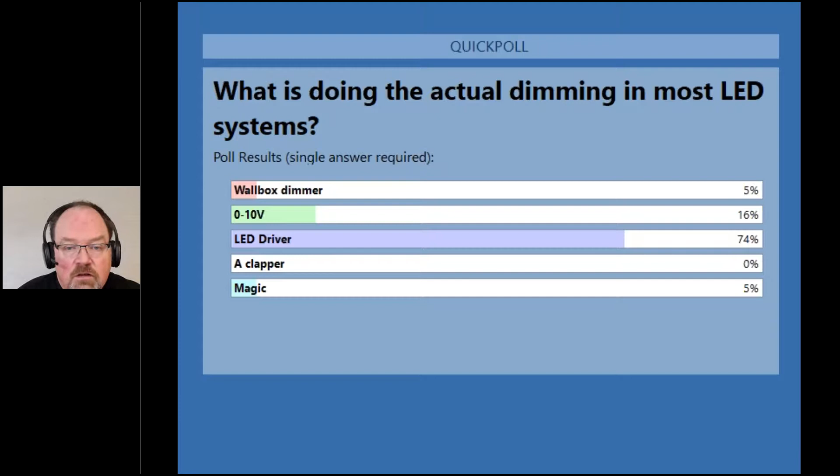The 0 to 10 volt is one of the protocols, which is a good lead into this. So if the LED driver is doing the dimming, and the wall box or whatever front-end device we're actually interacting with is not doing the dimming - all it's doing is telling the driver what to do - how do we communicate that? Key thing here is dimming control protocols.

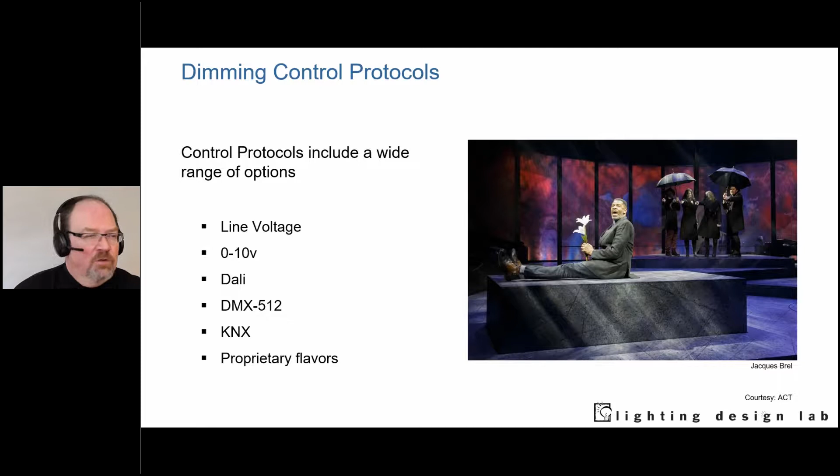There are a number of essentially languages that various devices speak. By far the most common these days is 0 to 10 volt. This is an analog signal - essentially, as the name would suggest, you have two wires, and the potential between the two will determine whether something goes up or down or stays in steady state. It's very inexpensive and ubiquitous. We used to use it a lot for fluorescent, then we kind of stamped it out in favor of digital systems for a variety of reasons, but LED has kind of brought it back. So this is the key one - it works well, but it's imprecise. If you have a field of 30 light fixtures, you might see slight variances between them.

So if you need precision, or you need something that is more controllable, architainment or color tuning, these things, you might look at DMX 512. DMX 512 is a theater standard. It was promulgated in the early 1980s and hasn't changed an awful lot since then. Some minor changes here and there, but for the most part, it is.

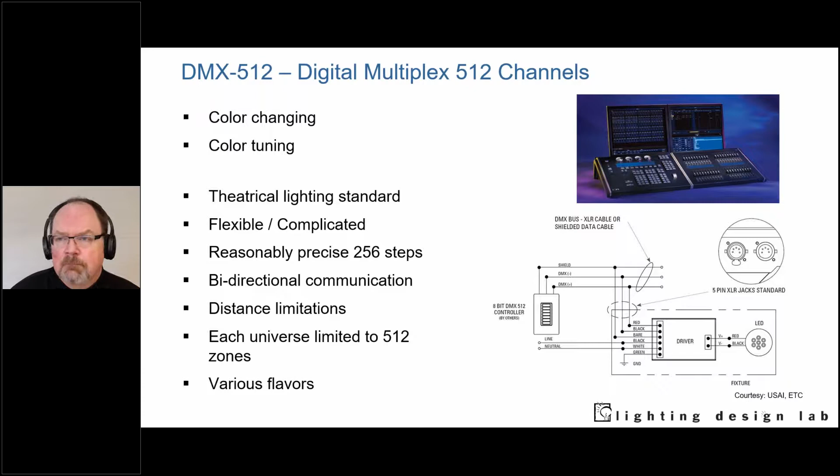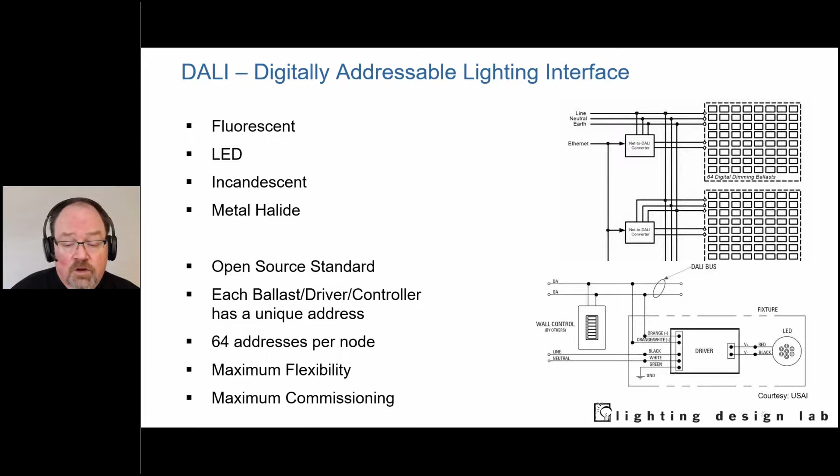Okay. Another one, DALI, Digitally Addressable Lighting Interface. This was very popular in Europe. It's an open standard, and it allows for digital control. So each individual light fixture is its own unique address. It never really got popular here in the US, except, oddly enough, in some of the proprietary standards. Lutron, for example, their ecosystem was originally based on DALI, with some twists. That gives you that whole notion of proprietary. So those are some of the ways that the systems communicate with each other.

Okay, that's the language. Then how is the communication done? For the most part, we're talking about wireless systems now. Most of the systems allow you to do wired as well. But the dominant thing I'm seeing in the industry is that we've gone to wireless. So we're doing that with Zigbee or Bluetooth or EnOcean, a variety of different ways. And the big reason is that it's less costly, right? If I don't have to run pipe and wire down a wall for a wall switch, that's a huge savings.

In fact, I did a quick bit of math with a couple of contractors, and the break-even point for how long it would take to equal the cost of switching out batteries versus the upfront cost of bringing a switch leg down a wall is something like 40 years. So you'd have to be replacing the batteries in the device for 40 years before you'd actually equal the cost of putting in the wired system. So that's a big thing.

But you've got to pay attention, right? There are a variety of different ways that these can be configured: star, cluster, mesh. Honestly, there are pluses and minuses to each of these, so I'm not going to talk about them too much, other than to say that each manufacturer will tell you that their way is the right way. And, like I say, there are pluses and minuses.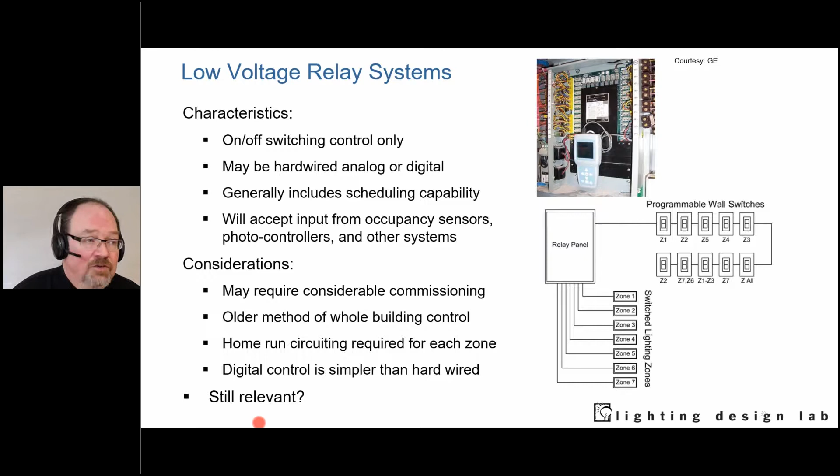This is an example of the power circuit kind of control, where we have a pair of wires coming from a relay panel to each control zone, and that's it, right? So there's a lot of pipe, a lot of wire, a lot of space that gets taken up in the electrical closet, and it doesn't allow us to do dimming, so it's not really quite as interesting. Okay, what if we add dimming?

Well, we come to this idea of preset architectural dimming systems, where we have a cabinet with dimming, basically silicon-controlled rectifier dimmers in an electrical closet. It's the same thing, right? You have two wires, you have a home run pair for each control zone, takes up a lot of room, takes up a lot of copper, and it's frankly quite expensive. So it does give you the dimming capability, but unless you're doing something like theatrical, where you've got lighting control zones that have 1,000, 2,000 watts to them, it's not really as useful anymore as it used to be.

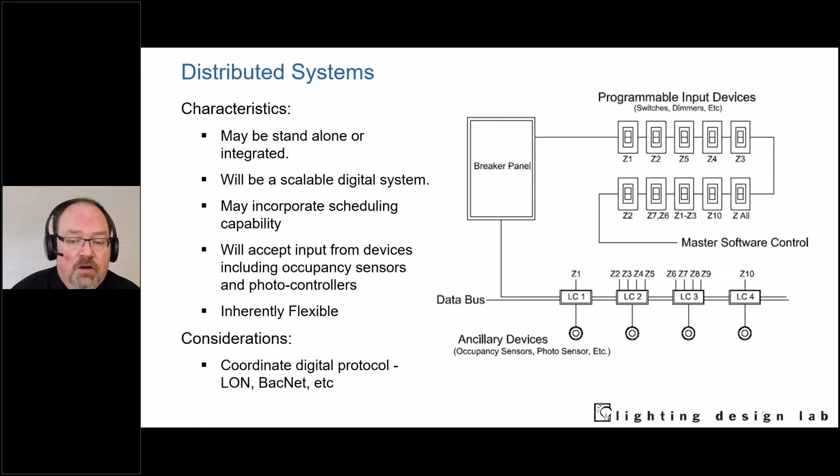Today, we kind of do this whole idea of distributed systems, right, where we have individual circuits that daisy chain from device to device to device. And then each device has its own level of logic that tells the light fixtures go up, go down, right? A special case of that, of course, is this whole DALI thing, where essentially every light fixture is its own individually addressable control zone.

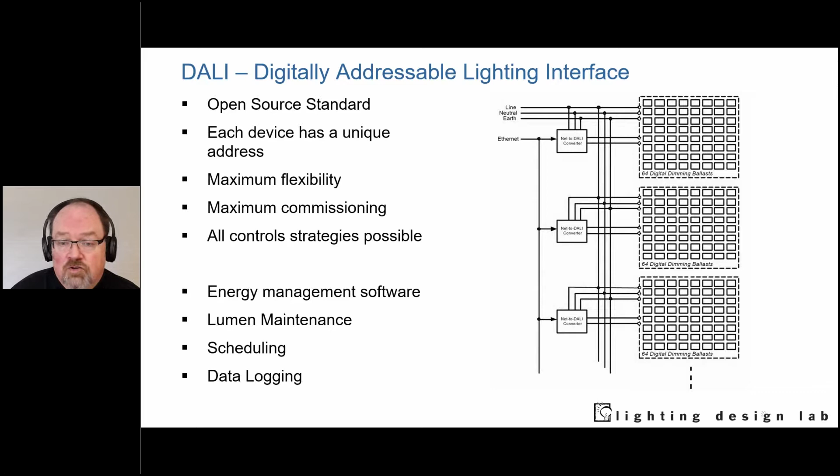And then we have this notion of luminaire level lighting controls, right, where we take all of the fixtures, the sensors, the logic, all that stuff, and wrap it up into one package. Luminaire level lighting controls, really interesting. We'll talk about them a little bit more tomorrow in particular. But the idea is that they tend to simplify purchasing and installation because you wind up essentially having everything together. You have individual control zones. I'll talk a little bit about the very specifics about why this is interesting when we go through the homework tomorrow.

Then, of course, there's power over Ethernet, right? So power over Ethernet is this whole idea of, instead of doing line voltage wiring, we do low voltage wiring with the ubiquitous Cat5 and Cat6 cables. So essentially, we go from a network switch to a light fixture, and we're providing power and data over that Ethernet cable. There are pluses and minuses to PoE, right? PoE gives us a lot of data capability. It also doesn't have to be run by an electrician. However, you're right back to that whole idea of individual home runs rather than being able to do daisy chain. So it takes up room in a closet, takes up room in the ceiling for cable trays, pluses and minuses.

If you're interested in power over Ethernet, this is not what this specific class is, but go to our Lighting Design Lab webpage, the educational tab, and you'll be able to find Armando actually did a class on PoE specifically that will go through a lot of the pluses and minuses there, right?

Okay. All right, so however we're doing this, the whole idea is network lighting controls today, they're better, right? They're more complex, but they're less complicated, right? They're more capable. Interestingly enough, they're really much easier than they've ever been, and they're much less costly than they've ever been. We'll have some examples of that tomorrow as we jump through.

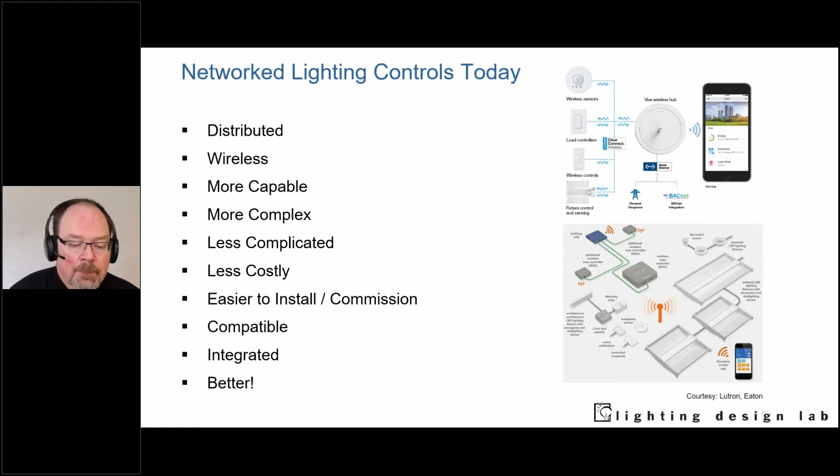Now, a key thing here as we kind of round out the day is that at the end of the day, we've got all this great hardware, right? We've got these systems. Somebody has to decide what is going to happen. Somebody has to put together a sequence of operations, right? How are we going to do this? Is that going to be the lighting designer or the electrical engineer, the architect, the owner? It could be any of these, right? But the idea is, as we're designing, buying, and installing these systems, somebody has to decide what happens.

What does that switch do? What does the occupancy sensor do? How does that all come together? We'll talk a lot about those tomorrow, about how we can go ahead and implement some of these things, how we can think about what these things do and how, right?

I'm going to skip this pop quiz because that's out of order. And I'm not sure why that is. All right, so I'm also going to skip these.

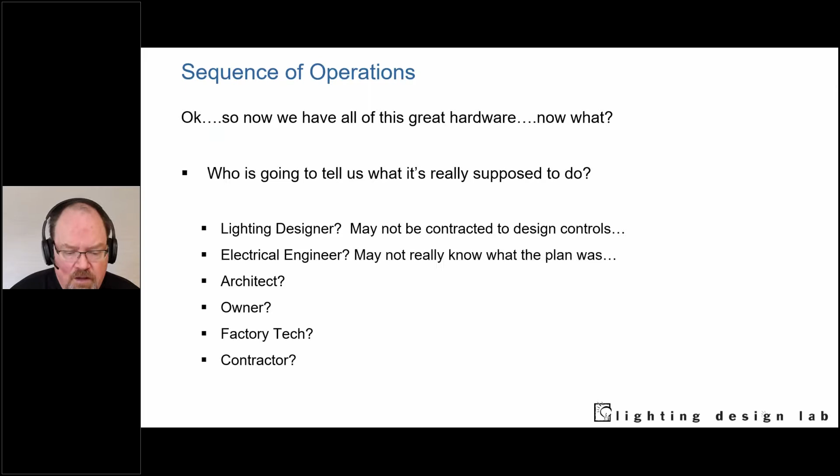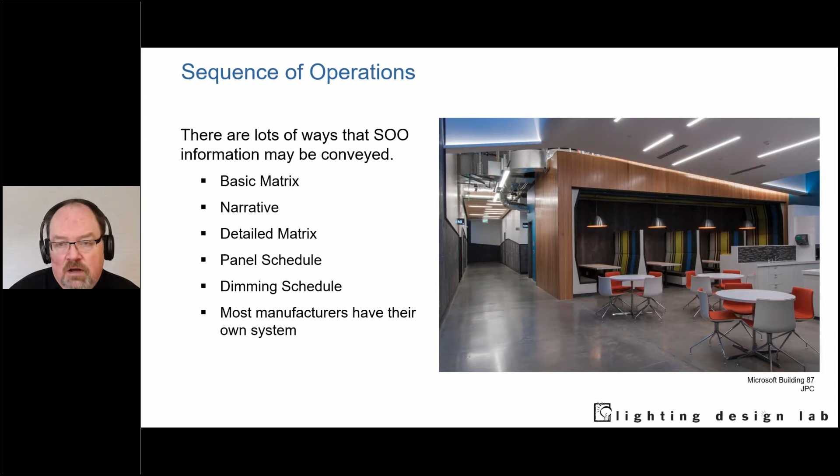There we go. So here are some of the things that we would wind up doing with respect to the sequence of operations, right? And there are a lot of different places that we might document this kind of information, depending on the project, depending on how we're doing it, right? It might be in a matrix, like I showed you earlier. It might be a panel schedule, dimming schedule. It might also be some kind of text-based documentation.

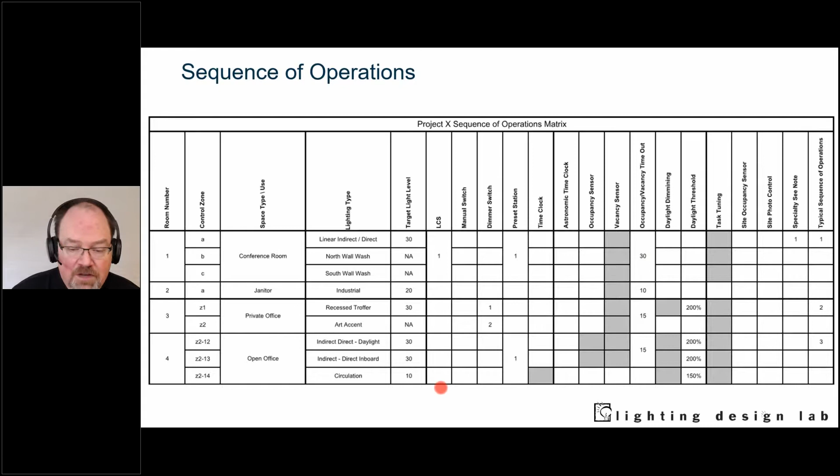Talks about the room number, talks about the control zone. So in the first example that I gave you, which was the classroom, this was a room controller, right? A, B, C, A, right? Room number 1, A, B, C. Room number 2, A. In the second example that I gave you, which was the WSU Troy Hall, it sets up zones like this, right? Room number 4, zone 2-12, zone 2-13, says what it is, says what the target light level is, talks about what the different types of control strategies there might be, and has some additional information. We'll talk about some of the additional information tomorrow.

Now, you're going to have some homework here. I want to leave you with a little bit of homework. So if you haven't already downloaded the homework from the handouts, please go ahead and do that. You'll find an Excel file that looks just like this, and you'll find a set of plans that look like this. This is Tech X Offices, right? So you'll have a plan, section renderings, all that kind of stuff.

And the idea is that you've got this office neighborhood. This is Tech Office neighborhood. You've got an open plan office with a window wall. You've got a private office, a small conference room that we would call a team room or a focus room. And then you've got a mid-sized conference room here, recessed in the ceiling 2x2, 2x4, 2x2. You've got a wall washer and a decorative.

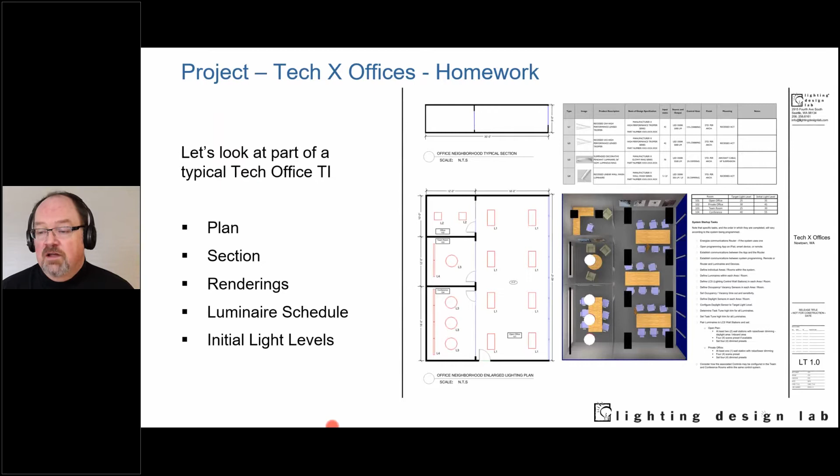It would look something like this, right? If we look in 3 dimensions, right? Looking from the window wall in, looking from the doorway into the open office with the conference room here. So give you some sense in 3 dimensions. So the idea is, think about how you would do the lighting controls for this particular space, right?

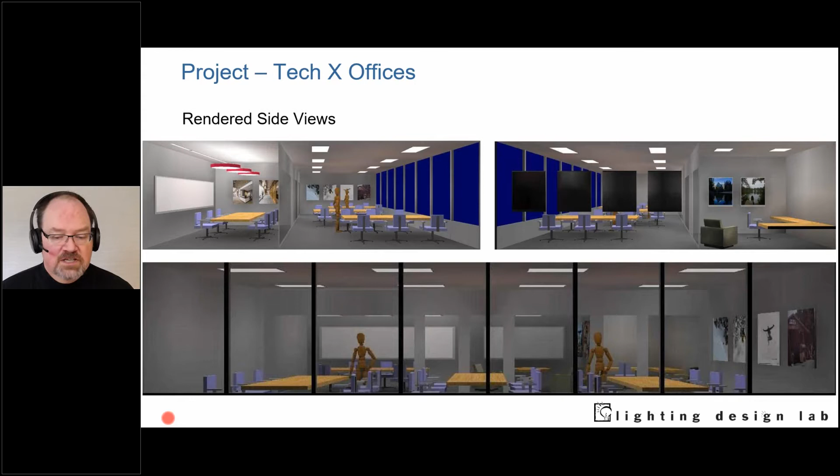You've got a variety of information here in the lighting control schedule, the lighting schedule, fixture schedule, just like you would in others. You've got some information here about the specific offices, the target light levels, so what am I designing to? But then also, what are the initial light levels here, right? Why would I use that? Well, this is what I get when I turn everything on. So if I'm going to do task tuning, right, I can figure out how much I need to dim this initial 45 foot-candles to bring me down to 30 foot-candles to give my task tuning, right? And initially save a significant amount of energy.

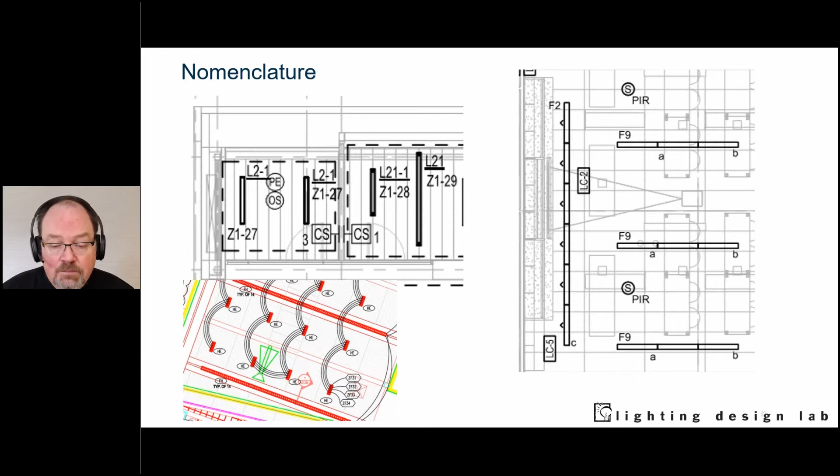Now, how you go ahead and determine how you want to show lighting control zones, spaghetti wire, the zone annotation, the individual room annotation, that's entirely up to you. Do it however you'd like. But you wind up having this matrix that you can fill out. You can fill it out however you'd like to, right?

Putting in the room numbers, the control zones, the space type, the lighting type, office, indirect or direct or accent lighting. What is the target light level that you're looking for, right? Lighting control station. I'll talk about that more tomorrow, what LCS means. It's better if I wait for that. But this will give you some idea, some way to sort of start to think about this space.

Think about how you would group light fixtures together. Think about daylight zones. Think about occupancy or vacancy sensing. Think about how you would like this space to be controlled. Right? One of the important things here, there's no right answer. Potentially some wrong answers, but not many.

So go ahead, and we're not going to be turning this in. We're not going to be showing off our work or any of these things. But I would like you to go ahead and spend a little bit of time thinking about the control zoning, about the strategies, about the hardware, about the sort of parts and pieces. Think a little bit about how you would initially go about this particular project.

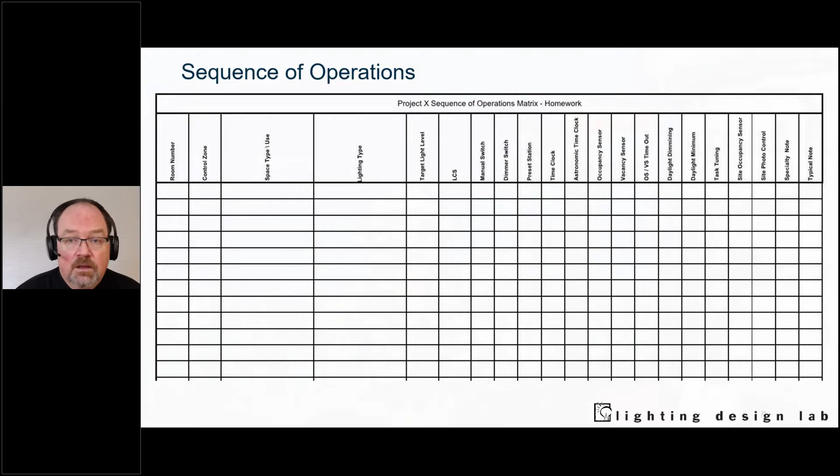And then when we start out tomorrow, we'll actually go through a couple of different iterations of how this might actually be done. Right? I'll show you how I would approach it in two different ways. So with that, I hope that's all clear to everybody. If there are any questions, go ahead and type them in now.